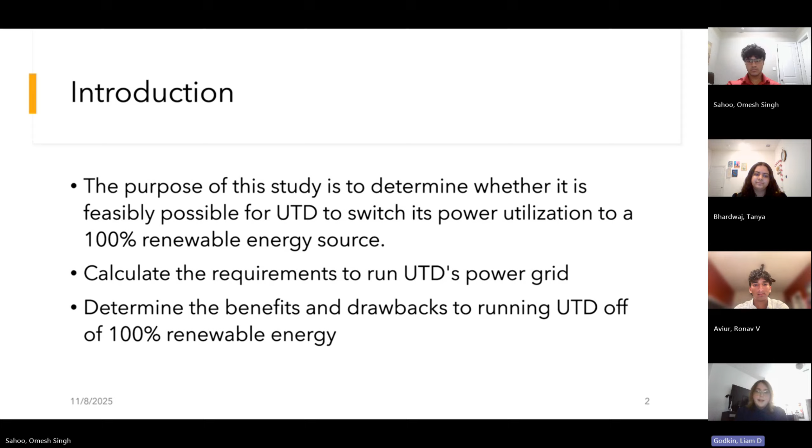Okay, so for the technical feasibility, I'm just trying to prove here that UTD can move towards a 100% renewable energy source to power its entire grid. So first, right now, UTD currently runs on a natural gas central energy plant, and it also has a backup on the city grid. So the campus already runs on a centralized system, which means instead of starting from scratch, we already have an existing source where we just have to switch it from its central energy plant to renewable energy sources.

Second, Richardson has a very good spot for solar energy, as on average there are 230 sunny days a year, which means that rooftops of buildings and parking lot canopies can help power the entire grid for the school. And the main question is, how much solar energy do we actually need in order to power the entire school? To figure this out, we took the 2024 data, which found that UTD used 131.6 gigawatt hours of energy, and that translates to roughly 87 to 90 megawatts of required solar energy capacity.

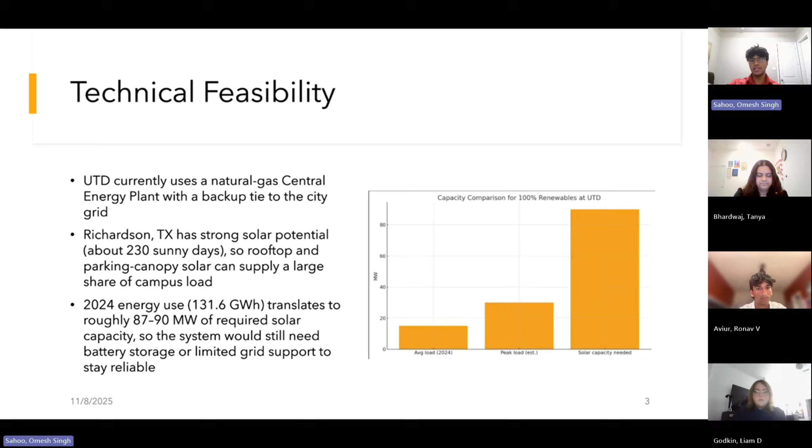So the system would still need a type of battery storage in order to store solar power for the entire grid for days such as rainy days when the school isn't able to get solar energy from the sun. And the graph shows what an average load and a peak load look like compared to the solar capacity it would need in order to power the entirety of UTD.

How we found this number was we took the amount of power being used at UTD in a year, which was 131 million kilowatt hours, and then we divided that by the amount of energy 1 kilowatt of solar makes in a year, which is 1,508, to figure out how much solar energy we would need to power UTD.

When we look at the economic side of implementing solar power at UTD, the first thing that stands out is the upfront cost. For a project around this many megawatts, that's roughly between $90 and $135 million, which is a big investment, but solar energy is really a long-term project. After installation, the costs for maintenance are pretty low, and there's no ongoing fuel expense. The panels last around 25 years or more.

Over that period of time, UTD could cut energy spending by up to 40%, which frees up millions that could go towards research or student programs instead of utility bills. Another positive is that UTD wouldn't be paying all of this out of its pocket. Federal incentives like the investment tax credit and other state grants are designed to make renewable transitions more affordable. And schools and government facilities are prioritized for these programs because, in a way, they lead by example.

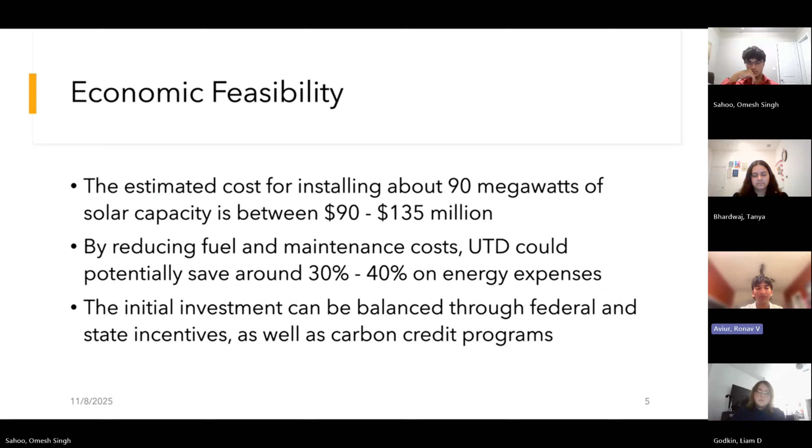For our operational feasibility, what we're going to be looking at here is whether or not we can actually place these solar panels on the campus itself, because a wind farm would just be too big for UTD to deal with, especially inside the Richardson area. So using our data, we have our metric that the land mass of UTD covers around 500 acres. It's a little more than that, but we couldn't get exact numbers.

But for that, we're just going to be using Austin metrics for the solar farm they do have installed, which gets 34.3 megawatts DC power on 437.6 acres. And we're going to use this also to see how well the system could deal with a flexible demand. Can we go to the next slide?

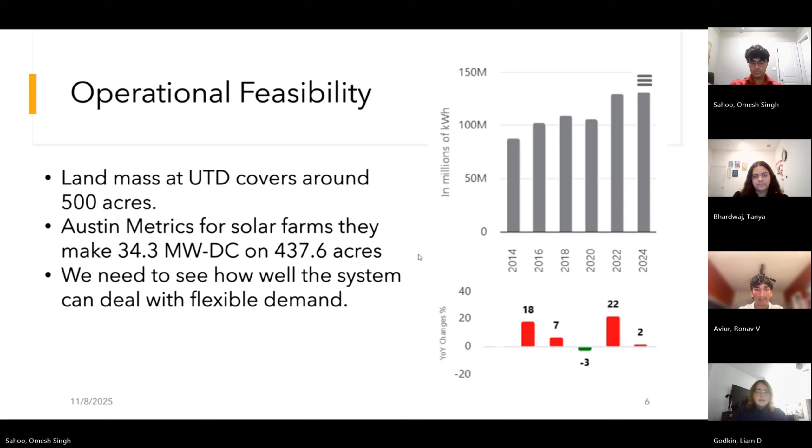So we have a lot of calculations done here, but basically we're going to be taking that 437.6 acres and dividing it by that 34.3 megawatts DC to get 12.76 acres per megawatt DC. Due to not having the Richardson exact statistics for solar capacity, we have to use the Texas average of 25%. Plugging that in, we take 1 megawatt and multiply that by how many hours are in a year, and then we times that by the 0.25 to get 2,190 megawatt hours per year.

And then we take the energy per acre, which is 2,190, divide that by the 12.76 acres per megawatt DC to get our 0.172 gigawatt hours per acre per year. And then finally, we take our actual energy usage in 2024, which is 131.6 gigawatt hours per year, and divide that by the 0.172 and get 765.1 acres of land needed to just generate enough energy for the 2024 usage of power on UTD. And that is not taking into account the flexible demand.

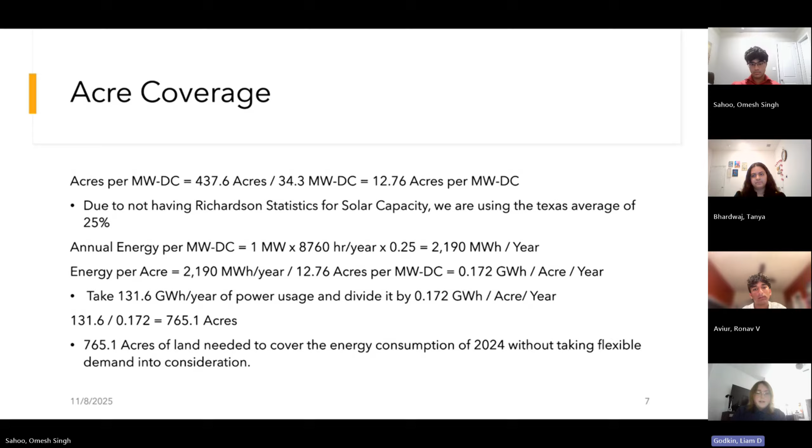Can we go to the next slide for that? Flexible demand, to calculate that, it's pretty simple. All we do is divide the 131.6 gigawatt hours by how many hours in a year, which is 8,760, to get 15 megawatt hours per hour. Due to not having official energy usage statistics for every hour at UTD in the day for averages, we're just going to have to use a loose calculation of 12 hours of sun, 12 hours of dusk.

And so you're going to have to multiply that by the usage per hour that we just calculated. And that comes out to about a two times multiplier by adding the days and dusks and then dividing it by the days. So we'll need around 30 megawatt hours per hour to power UTD through flexible demand, which would nearly double how many solar panels we would actually need installed on the campus. And if you can go to the next slide.

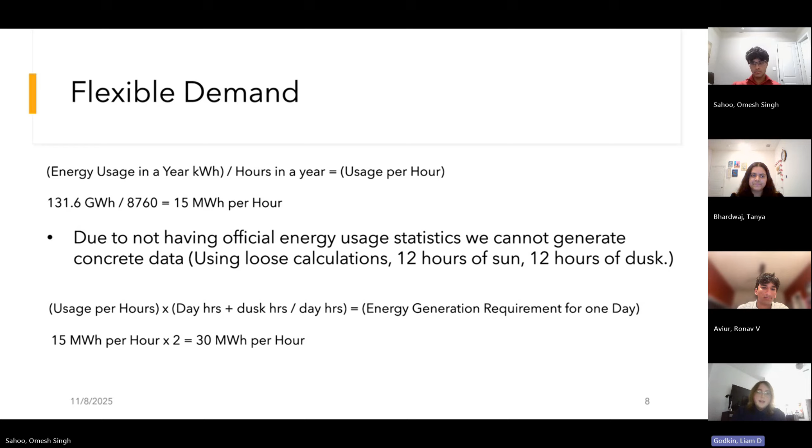Because of that, we're going to say that it's not operationally feasible. Taking into account the area surrounding UTD, we can't just expand or put it somewhere else onto a big solar farm like many other places do. UTD only has around 500 acres of land to utilize, so this would cover every single square foot that we have on UTD just to power how much they use in 1 year. That's partially why most institutions only cover a small portion of their energy using renewable energy sources, because they simply cannot generate it for 100%. The flexible demand would increase the acres and it just becomes too much to deal with.

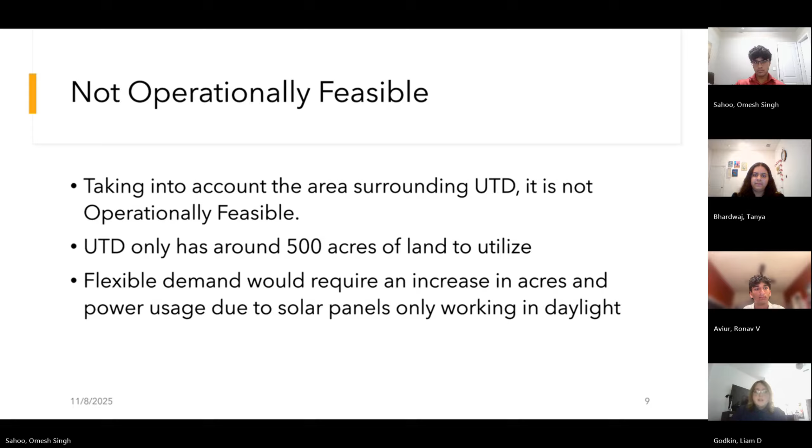Okay, so for the environmental feasibility, we already know that UTD has shown a very strong commitment to sustainability. For example, the university has an AASHE STARS Gold certification and outlined Goal 5 in its strategic plan, which focuses on creating a more sustainable campus. This shows that environmentally, the university is already aligned with renewable energy goals, which makes this transition not only feasible, but consistent with UTD's long-term direction. And if we can go to the next slide.

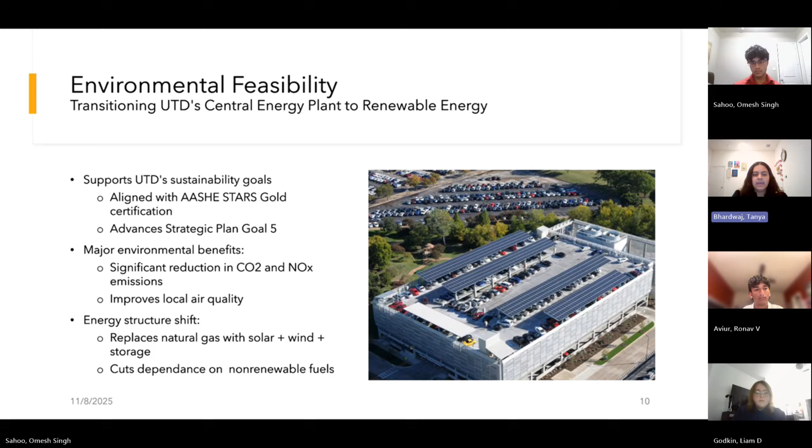Okay, so replacing the central energy plant's natural gas system with renewable sources like solar and wind would directly reduce emissions of carbon dioxide and nitrogen oxides. According to data from the EPA's AVERT tool, shifting energy production at the structural level leads to a much greater environmental benefit than small-scale individual behavioral changes. So on average, every kilowatt hour of energy shifted from fossil fuels avoids about 0.8 pounds of CO2 equivalent, which adds up very quickly for a campus as large as ours.

And just beyond cutting emissions, this project also helps UTD maintain its leadership in environmental stewardship. It would improve our air quality around campus, reduce our dependency on non-renewable natural gas, and support a cleaner energy grid for North Texas overall.

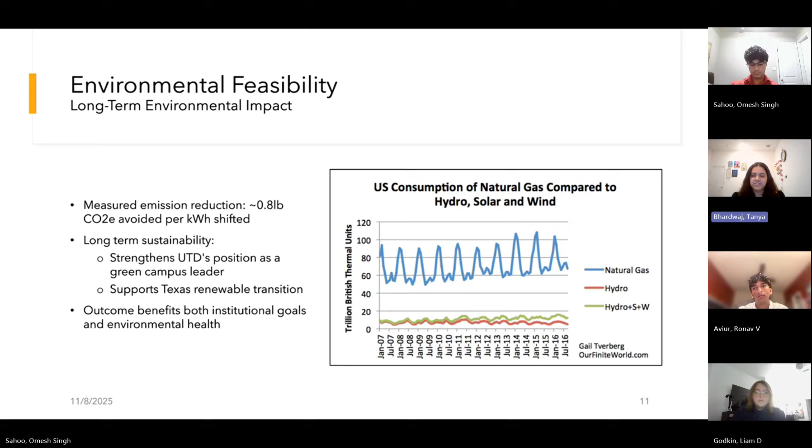Legally, UTD is in a pretty strong position to move forward with a renewable energy project like this, because both Texas and the federal government have built-in support for universities that want to adopt this clean energy project moving forward. And the investment tax credit is one of the biggest incentives. It basically reimburses a portion of the project's cost through tax credits, and this makes the financial side a lot easier to handle.

But beyond money, the regulatory path is clear, which is a big portion of it. Texas has an open energy market, so institutions and colleges like UTD can generate their own power, and they are also allowed to work directly with solar providers. Most of the requirements, which involve safety permits, compliance, and environmental clearances, are very achievable and pretty standard procedure under the current laws.

Additionally, UTD already has a strong sustainability framework in place. The 2020 sustainability report shows that it's compliant with environmental and building standards. So expanding into this solar field would build on those efforts. So from UTD's legal perspective, this is just the next logical step, and the laws, incentives, and structures are already in place, which means that it's more about execution than risk in the future.

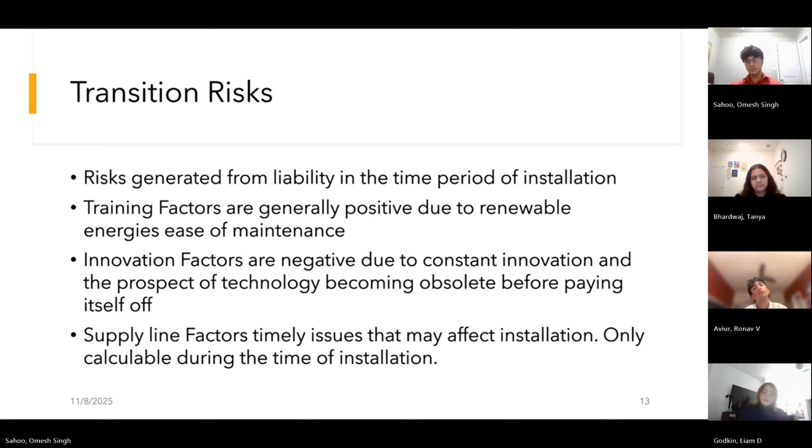Next slide, please. So in conclusion, we would say that this is technically almost feasible from an energy generation standpoint, but operationally it is unfeasible, largely due to UTD's placement inside the Richardson area. There isn't really enough room for a large solar farm nearby that could support it. And we can't put it on the university itself since there aren't enough acres. So I would say those both make this technically unfeasible.

The legal, economic, and environmental positives just don't outweigh the lack of technical capability to supply enough power. Legally, it's all fine. Economically, it does have its benefits, with all the tax cuts and power saving. And environmentally, it is great on pretty much every scale, switching over to renewable energy.

Luckily, these are things that are rapidly advancing. Easily in a couple of years, we could have different technology that can make up for the operational feasibility falling through and allow us to install this on UTD campuses. And even then, we could also do a smaller percentage. Only a 40% renewable energy source could easily be done on top of UTD's energy system. Next slide.